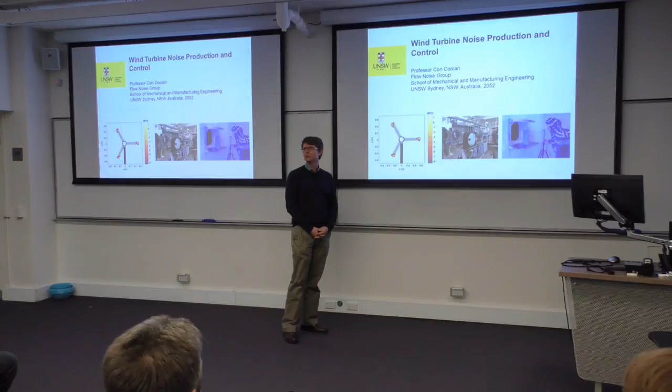I'm going to talk about wind turbine noise, how it's produced, and some ways to control it. I'm from the Flow Noise Group at UNSW, and we do more than wind turbine noise. We do a lot of airfoil noise, bluff body noise, all kinds of noise. We're even doing supersonic noise, but I can't talk about that tonight.

What I'll talk about is wind turbine noise. Here's a little outline of what I'm going to cover. First, a tiny bit about environmental noise, then how wind turbines produce noise very quickly, just the basic mechanisms, and then I'll go straight into how we've measured wind turbine noise in the lab. We've built a wind turbine noise rig, or rotor noise rig.

We've done numerical simulations, and from that rotor noise rig we looked at blade tower interaction noise. This is a very low frequency and infrasonic noise source on a wind turbine. Then we switch in the spectrum to trailing edge noise, which is high frequency noise production above 500 hertz. I'll end the talk with some recent work we've been doing on controlling trailing edge noise.

I probably don't really need to go over this to this audience, but environmental noise is a form of environmental pollution, and so it needs to be controlled. Noise from any source can cause either acute effects like hearing loss, or immediate effects through annoyance, stress, etc. But over long periods of time it results in hypertension, reduces learning in children, and productivity drops in the workplace. Even long term, it can cause health problems.

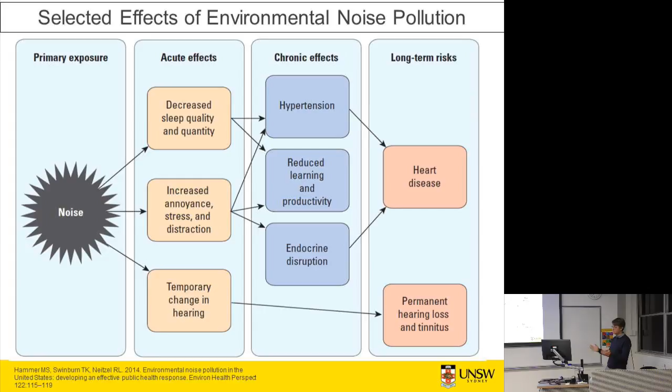And that's why most of us do what we need to do, which is measure and control noise in the community. So wind turbines are a source of noise, and they need to be controlled, and there are regulations around it. So it's a good thing to try and understand how they produce noise and how we can reduce it.

Reducing noise is good for the community around wind farms, but it's also good for producing more renewable energy, and it's also good for the cost of a wind farm. If you can reduce the noise of each unit, you can put more wind turbines per square kilometre. But more importantly, if you can reduce the noise from the tip, you can increase the speed of the turbine and reduce the torque loads on the gearbox, reducing the cost of the turbine exponentially. So there are good economic reasons for reducing the noise on turbines.

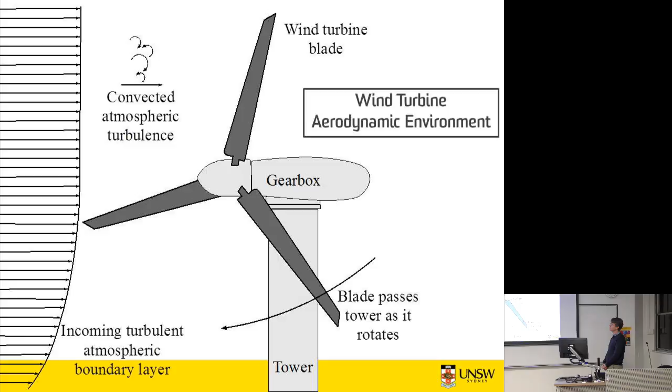This is a turbine sketch, and I'm going to talk about how the aerodynamic environment around a turbine creates noise. You have a turbine on a tower, in wind. The wind approaches the turbine through a boundary layer, an atmospheric boundary layer, so the mean velocity profile is faster at the top and slower at the bottom. As the rotors go through that boundary layer, they experience different loads, and those different loads create loading noise on the turbine.

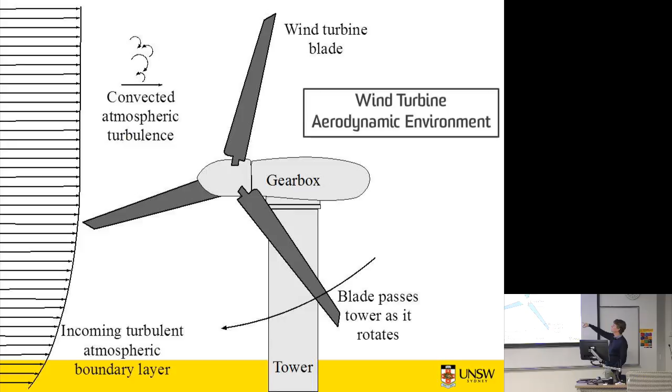That boundary layer isn't steady like that, it's unsteady. It contains atmospheric turbulence, so the air is unsteady and moving around. That turbulent flow interacts with the moving blades and causes broadband, lower frequency noise. As the blade passes the tower, there's a flow interaction between the tower and the blade. Even though it's an upwind turbine, the old downwind turbines had a very strong wake interaction.

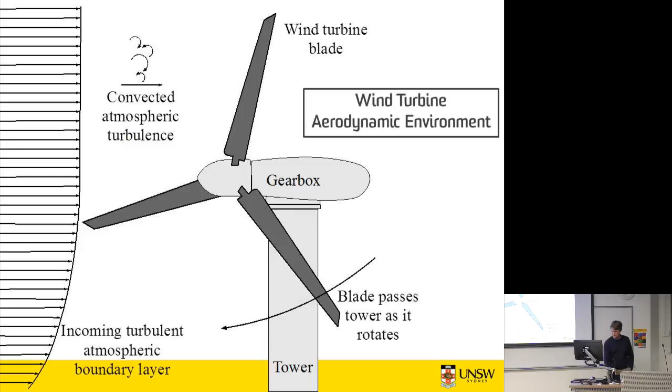As I'll show, the interaction between the blade and the tower is different in upwind turbines, and can create tones at the blade pass frequency and multiple harmonics. The other very important noise source is the trailing edge, which I'll talk about in more detail later. So let's look at a mock spectrum to describe wind turbine noise in a bit more detail.

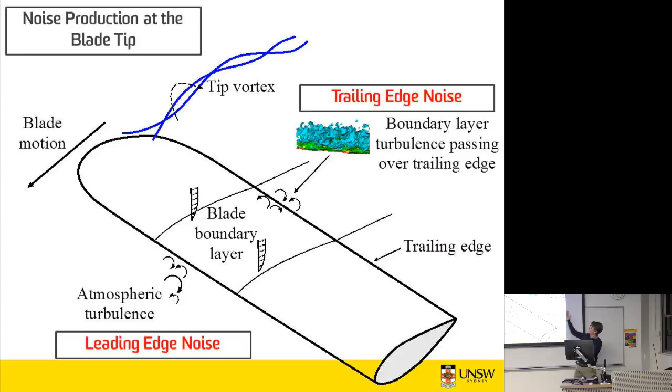Okay, so if we move out to the tip of the rotor blade, this is just a chunk of the tip and it's moving through space. You can see the atmospheric turbulence hits the leading edge. That causes fluctuating lift, fluctuating forces, and it creates noise. Then as the flow goes over the blade, it creates a boundary layer that becomes turbulent.

And as that turbulence passes the trailing edge, the unsteady pressure in that turbulence, when it goes from the blocked hard surface of the blade to the free surface behind the blade, a little bit of that energy escapes as an acoustic wave. And because it's turbulent, it's broadband, so it creates broadband noise.

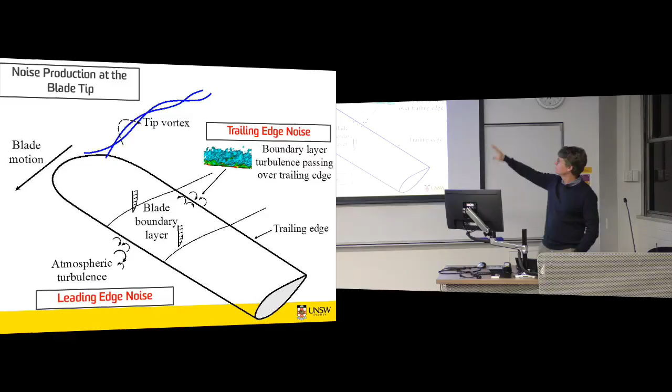So that occurs right along the blade, but it's only really noticeable at the tip because the tip is where it's travelling the fastest. So there are two noise sources there: the trailing edge noise and the leading edge noise.

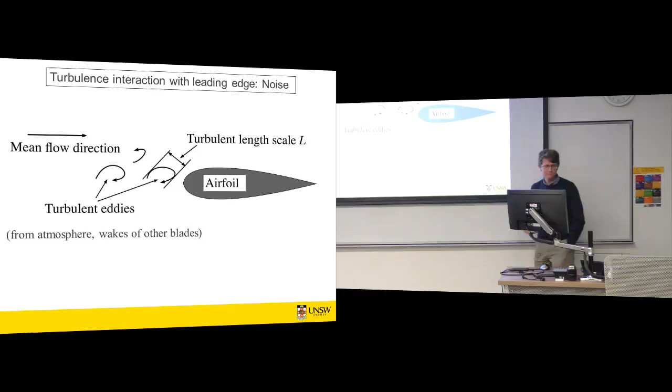Okay, this is a little sketch of how leading edge noise, or turbulence interaction noise, is created. They have turbulent eddies in the flow, and they hit the airfoil, creating a fluctuating lift and noise.

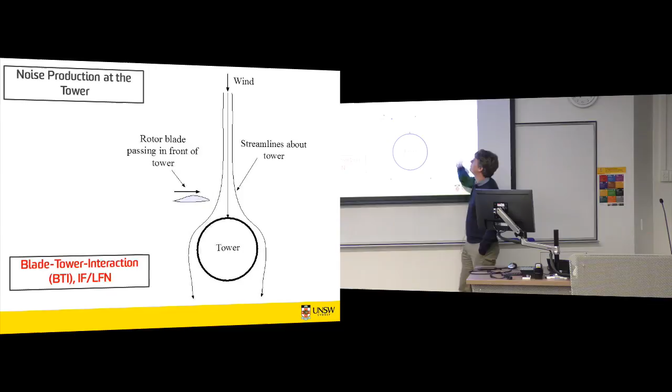So as that blade passes through those deflected streamlines, it creates unsteady loads on the blade. But that's not the whole story, which I'll show in some of our measurements. Anyway, that's a low frequency or infrasonic sound source, depending on the size of the turbine.

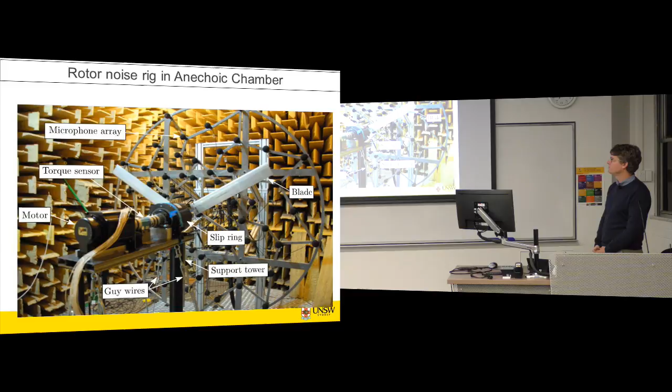Okay, so what have we done? We've been lucky enough to get funding from the Australian Research Council to look into wind turbine noise sources and its production, and this builds on a lot of work we've done on airfoil trailing edge noise, leading edge noise production and control. So one of the big things we did in this project was develop this rotor rig.

It's a 3-bladed rotor rig. It can be run as a fan - we always ran it as a fan, but it's designed to run as a turbine in a wind tunnel. What's it got? It's got 3 untwisted, straight NACA 0012 blades, so 1, 2, and the third one's down here. It's driven by a motor, and has a torque sensor and slip ring so we can get data out if we need to.

And we built a 64-channel microphone array with 64 GRAS precision array microphones. This is a picture at the University of Adelaide anechoic chamber where we did some of the tests that I'll show you today.

So we ran this as a fan, an unloaded fan with 0 pitch angle of the blades, and we also ran it at multiple pitch angles as a fan. The thought being that it's very difficult to get this into a wind tunnel and take useful acoustic measurements. Most of the physics of the noise production is the same on a fan as a turbine, and we're using this to validate numerical results, and then we can run the numerical model as a turbine and explore those noise sources as well.

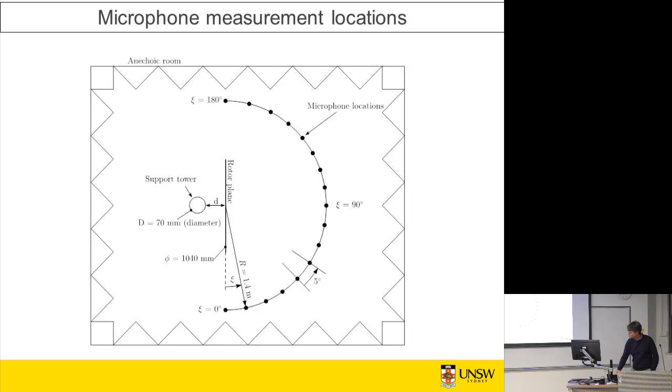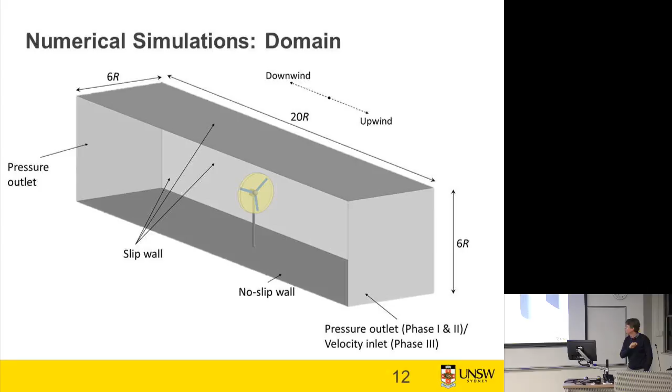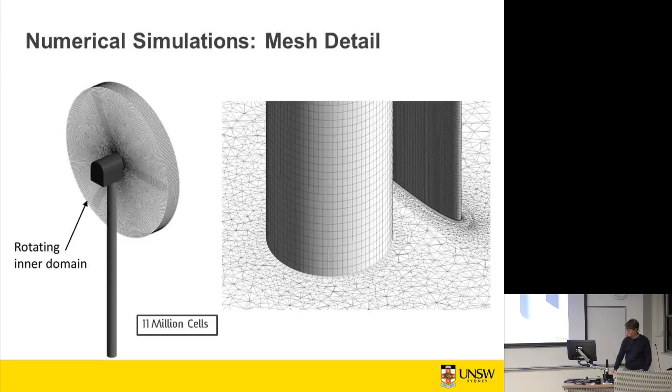For the numerical simulations, we did CFD of the flow through this rotor system, and Yendru, sitting here, did this. There's a computational domain and the rotor's stuck in the middle. We could have flow through this or not, depending on the situation we wanted. It was modelled with a rotating inner domain for the blades to spin around, and that's some of the incredibly fine mesh that Yendru put together for this project. So 11 million cells for that grid.

We used the CFD simulation to calculate the noise, and Yendru used an acoustic analogy for that. That took the fluctuating forces on each blade and the tower, and using the analogy you could calculate the acoustics at any observer position that you liked.

So what did we find? I'll show you some results. First, I'm going to show the rotor rig experimental cases, as an unloaded and loaded fan. So it's a fan with zero pitch and with multiple pitch angles, and then simulation results for the same, but with extra ones for a wind turbine test case. The first set of results is for blade tower interaction noise, which is low frequency noise, and the second set will be for trailing edge noise, which is higher frequency noise.

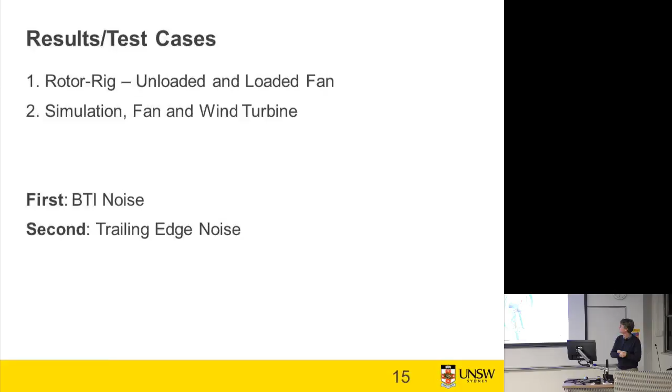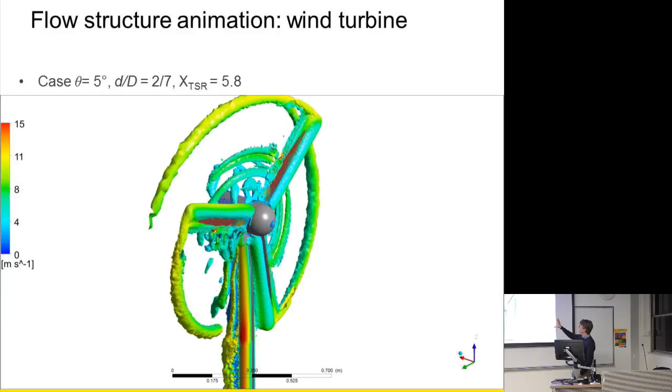As a wind turbine, if we now keep the fan the same but put in a forward velocity, it operates as a turbine. Very similar flow field, where we get tip vortices being generated by each blade, and then they convect over the support tower. I should mention this is what we call an unsteady RANS simulation. It won't get all of the turbulence spectrum, but it's very good at getting the part of the flow at low frequency. It doesn't get the high frequency component, so it's very good for doing the blade tower interaction simulation work.

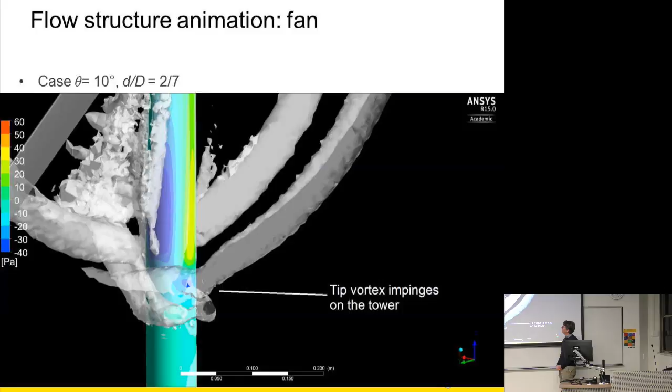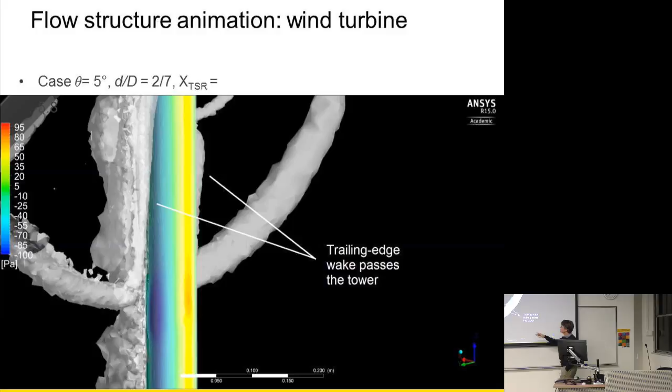If we zoom in at the tower, we can see the flow structures. This is the tip coming around, and behind it is a vortex, and then the vortex hits the tower as it gets convected downstream. That's as a fan. If we run as a turbine, this is subtly different aerodynamics. This time we're still getting the same vortex impact on the tower, but we're also getting this big wake structure going past the tower each time.

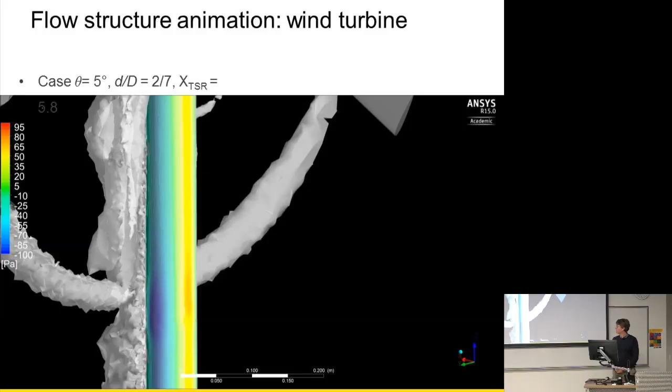So let's look at the pressure field and explain how the turbine creates low frequency noise. The top one is the unloaded fan, and you can see as the blade, zoomed into that same region - this is the blade, it's moving this way, this is the tower, and this blue here is low pressure around each side of the airfoil. Because it's set at zero pitch angle, it's the same either side. So as that goes past, these blobs are going to interact with this and create noise.

If you turn it into a fan, this side becomes the suction side of the airfoil, and the other side is the pressure side, so you get a higher pressure interaction with the tower. As a wind turbine, the opposite happens - the suction side, instead of being here, is on this side. So as it goes past, it hits the tower and creates a noise, but of a different character. I'll show what that means.

So here's a video - that's the unloaded fan. You can see as the blade goes past the tower, it creates fluctuating pressure loads on the tower.

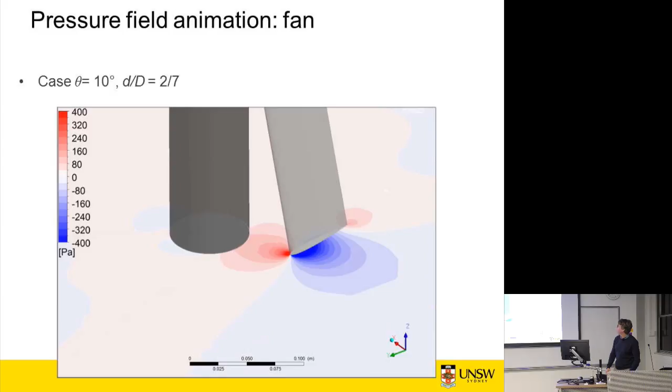So, what's the actual acoustic pressure look like? This is a comparison between an experimental measurement in the anechoic chamber and the simulation, for a microphone at hub height directly in front of the turbine.

So the turbine's going around, and right in front you're getting 3 pulses. This is phase averaged over multiple rotor revolutions, so we've taken out a lot of the stochastic unsteadiness, and we're just left with this black pulse. You get these 3 pulses every time a blade passes the tower.

And looking at Yenju's simulation, it's pretty hard to deny he's not capturing the major physics. So that was very pleasing to see that we can simulate that. So now we want to know what's going on.

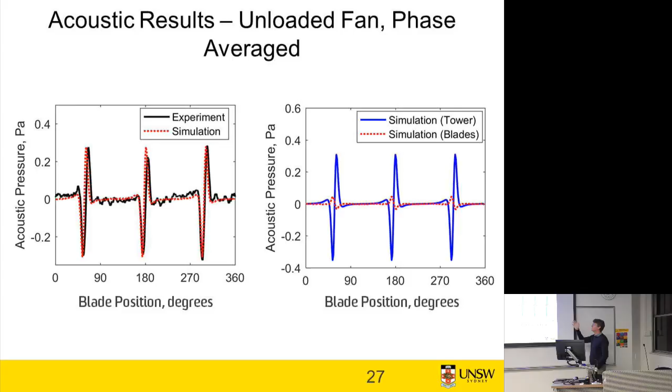The really surprising thing to us was, because we got the simulation and we're using this particular type of analogy, we can separate out the noise sources. We can separate what's happening at the blades and what's happening on the tower.

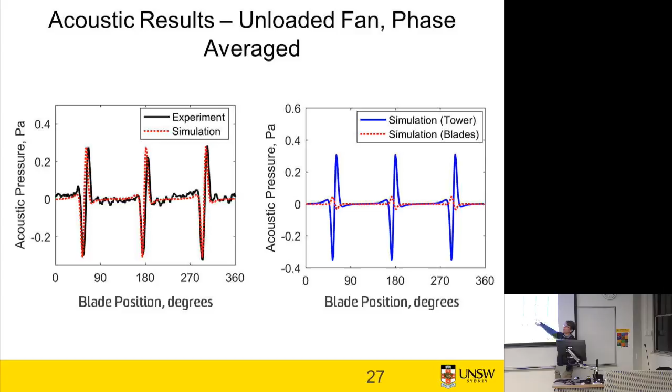The red line is what happens on the blades, so you get this little pulse, and it looks okay, but the major noise source is the tower. The tower itself is radiating much, much more than each blade, which was a real surprise to us.

And it must be true because we're getting such good comparison with our experiment. So the tower itself, as the blade goes past, because there's a distributed pressure load on the blade, there's this potential flow interaction. It just creates a large fluctuating force on the tower, and it radiates a big pressure wave.

So if we look in the frequency domain, we can compare the simulation and experiment. This is very close. So this is the experiment and the simulation, and the peaks match nicely, but because the simulation's on a computer, there's no background noise.

So this here is the background noise. Well, that's probably rotor trailing edge noise, which I'm going to talk about later. But this is the background noise of everything that's not blade-tower interaction, and the simulation doesn't get that.

But it does get the peaks, and because we got the waveform right, it's getting this really interesting phenomenon where this is the blade pass frequency, but the harmonics are much higher in intensity because the waveform looks like that, because, you know, it's not a sine wave.

So that's quite close, this one on the left, to the tower. If you move it away to one tower diameter away, that's kind of typical of a turbine tip.

If you look at a turbine tip under full load, it bends back. It can be around that sort of distance, and you still measure the interaction, but it's a lot lower than the closer case.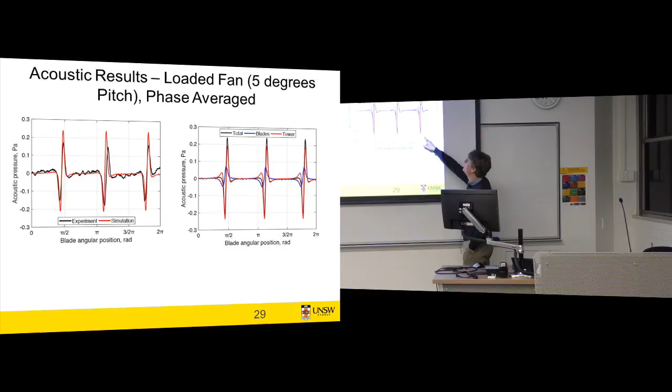But when you go to a turbine, because we've only simulated for turbine, what's really interesting is, because the low pressure side's now on the other side of the blade, everything lines up. So black's total, blue's blade, and red's tower, and even though the blade is reduced somewhat compared with the tower, for the wind turbine they all line up.

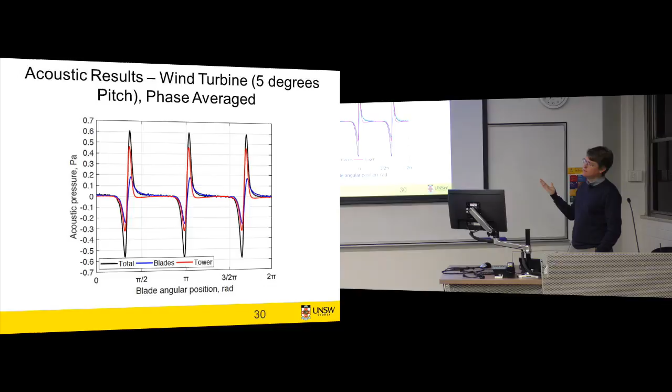So they all reinforce to give quite a strong pulse. That's quite interesting. So, you know, if you've got a turbine, the blade and the tower are both contributing to the low frequency noise that it generates.

So if you look at the directivity, how this pulse varies around the turbine, we've got different waveforms at different angles. We've got the sideline at 180 degrees, 135, and full on.

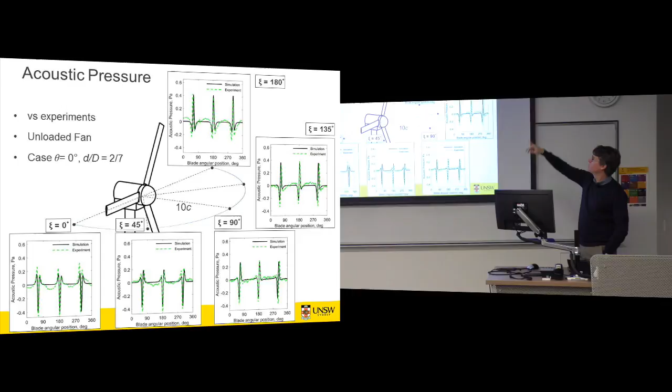We've already seen that one, and then off to the other side you can see how it changes. So on that side, as the blade is going that way, it gives a pulse out that way, and as it retreats, it's a suction pulse, and then you can see how it transforms as you go around.

You might notice there's not quite such good agreement off axis, and that's because the thickness noise wasn't modelled in the analogy. But I believe Andrew has modelled that, wherever he is, and he got it right.

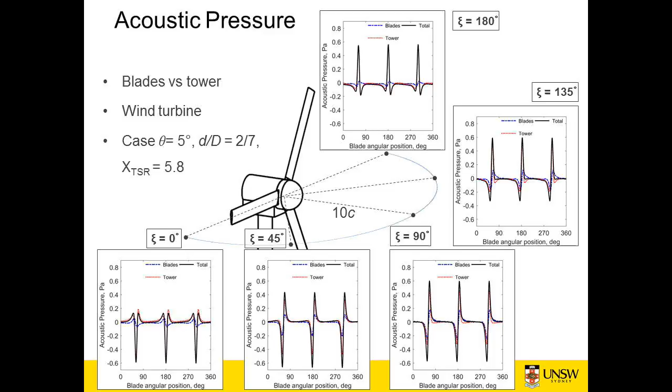Okay, so as a turbine, this is a fan. I'll go as a turbine, same sort of thing. You get a pulse out one side and suction on the other side, and it transforms as you go around.

But if you look at that per azimuthal angle of the rotating blade, that's like a dipole spinning around, because the force is spinning around the tower. So that's time averaged, and it looks like a monopole because it's circular, but in reality it's like a spinning dipole. So it's quite interesting physics.

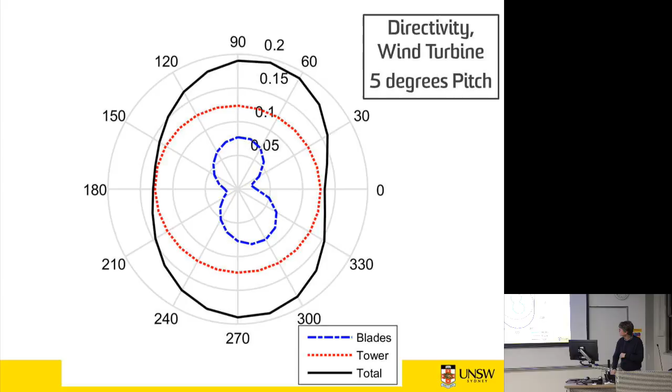Okay, so that's the low frequency side of things. So I'm going to shift gears now and talk about high frequency stuff. So this is how rotor blades create noise themselves. The flow travels over the blade, it goes turbulent, interacts with the trailing edge, and creates this thing called trailing edge noise.

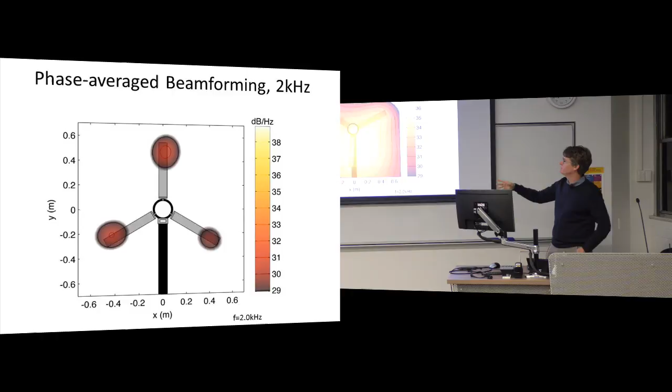As expected, the noise is predominantly from the tip region, because that's where it's going the fastest. And as it passes the tower, you get this flash, and I believe that's a reflection from the tower plus some sort of mechanical response of the whole system at that frequency. So that was at 2 kilohertz.

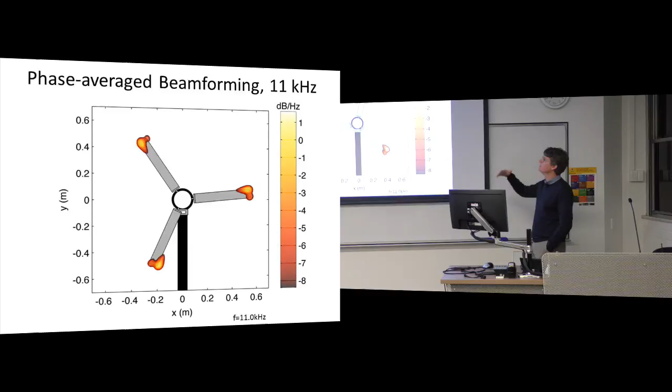So we go to 4 kilohertz. We're starting to see the noise source being more clearly defined, and jump straight to 11 kilohertz. Because this is scaled, these frequencies don't correspond to what you'd see in a large turbine case - it's probably about 8 to 10 times higher than for the same sort of conditions. But anyway, at 11 kilohertz, you can clearly see this is the brightest spot, and that's trailing edge noise.

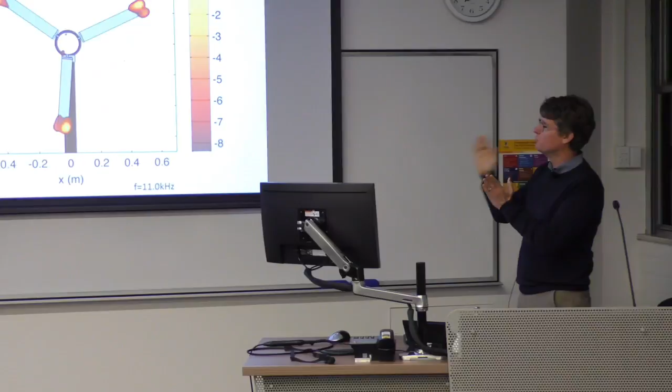We also get this interesting spot at the leading edge, and that's the tip vortices being formed - it's a square tip, you don't normally have a square tip, but it's tip vortices forming over that. It creates a bit more noise.

And we can even image up to nearly 19 kilohertz. And at 19 kilohertz, that leading edge noise source is very intense and quite prominent. So Zebb Prime, who did these acoustic measurements, called that the flaming turbine, because it looks like it was on fire.

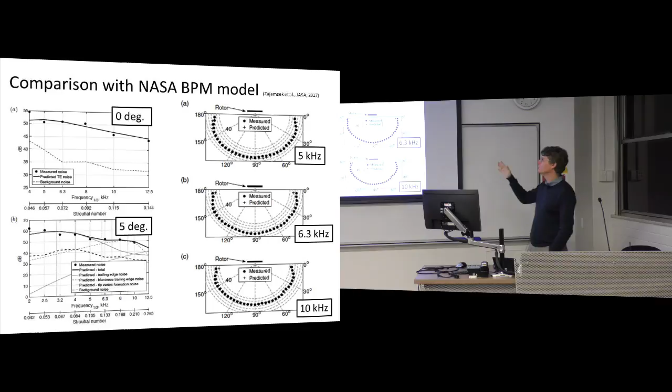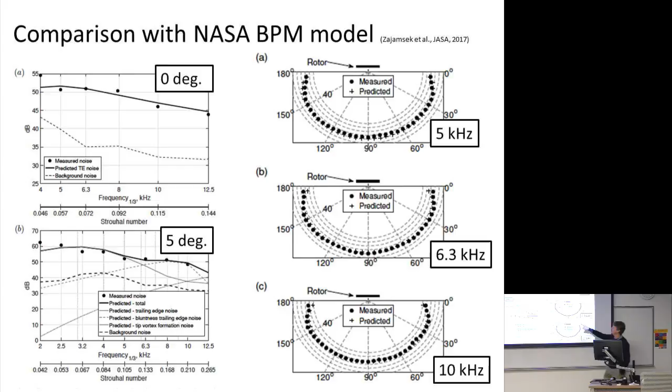We modelled the noise source using this NASA model called the BPM model for trailing edge noise. We've got a paper on it, but we showed pretty conclusively that from about 2 kilohertz up, it's trailing edge noise, because these are the third octave band levels, and that's what you'd predict from this special model for that rotor blade, and it works quite well.

Even at all angles, the dots are the measurements and the crosses are the predictions, and in most cases it matches pretty well. So we know we've got trailing edge noise working on that rotor rig. Now that we've got trailing edge noise on there, we know where the noise is coming from, so let's do some clever things to try and reduce it. So how do we do that?

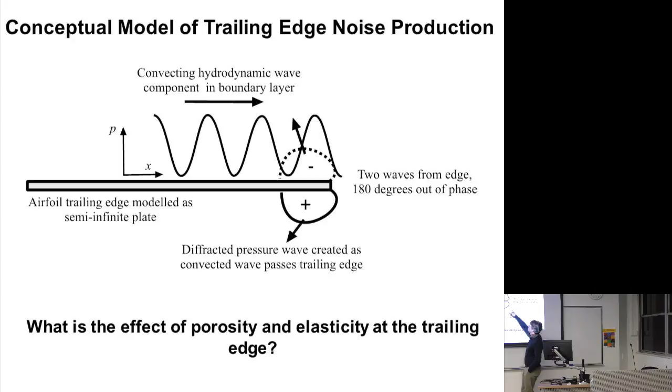We go back to first principles, and this is my crazy diagram about trailing edge noise. This grey rectangle is my idealised airfoil. Think of it as a semi-infinite plate that goes forever to the left, with an edge here. This sine wave on top is the boundary layer, full of pressure waves. If we take one wave number, we can model it as a sine wave of pressure convecting to the right. When that goes over the edge, the high pressure pushes around and creates an acoustic wave, and a rarefaction wave, an expansion wave, the other way.

That's trailing edge noise. Because it's turbulent, in real life that sine wave is a mess of all wavelengths and it's all random, but to help me think about what's going on, I just try to think of one case going over that edge. So the problem is how this is generating this pressure wave. How can we damp that out?

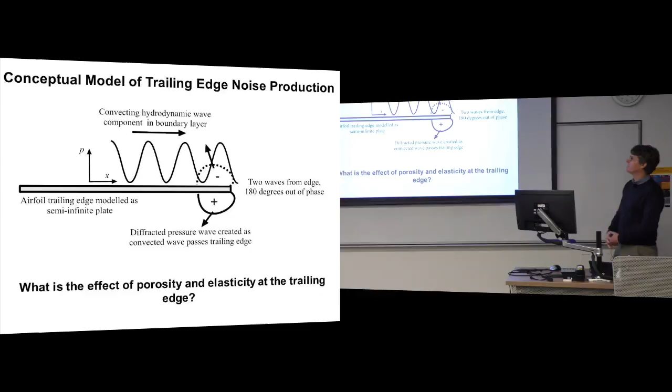So not just me, a lot of people are looking at porosity and elasticity at that trailing edge. If we make the edge porous, or absorbent, with some impedance that's not going from fully blocked to free, we can smooth out that transition from the sharp impedance change to more gradual, and we won't be as efficient at generating these acoustic waves.

A lot of this has come from looking at owls. It's been a topic for a few years now - we all know these particular types of owls fly incredibly silently, and we think it's because of the wings, which have all these features: a leading edge comb, a velvety coating, and what we're interested in, a serrated and poroelastic edge, so the edge has got a serrated shape and is simultaneously porous and elastic.

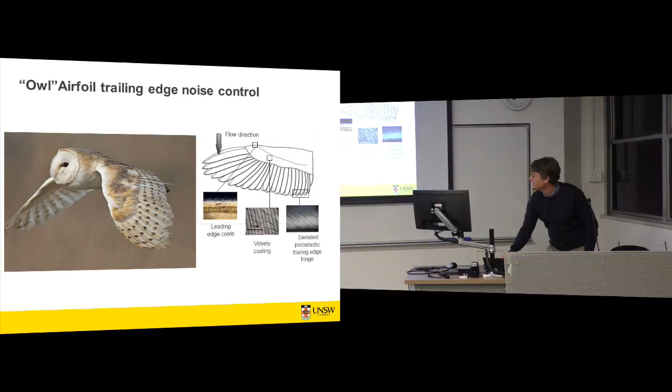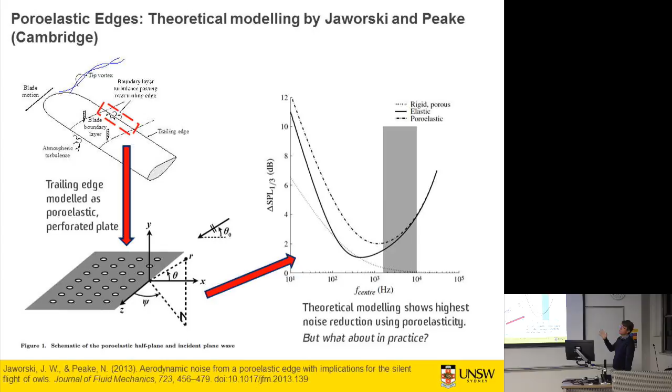That's prompted a lot of experimentalists to start playing around with porous and elastic materials to see if we can control this edge. So that's what we've been doing.

This is a schematic of our anechoic wind tunnel here at UNSW, not to scale. We have a contraction - there's a fan that sucks flow in here, we actually have a big muffler that's not shown, and it sucks air through here into the anechoic room, and we test in the open jet. Down the bottom is a photograph of inside here for a test I'm about to show.

This is Chao Yang's work, a PhD student of ours. Here's a NACA 0012 airfoil - that distance is 455 millimetres, and this is a 200 millimetre chord airfoil. We put edge extensions on here of different types, which I'll show you in a minute. This is a small microphone array we use to image the noise source at the edge and work out if it's doing what it should do. Chao Yang was very diligent and put a laser vibrometer, that's the red dot, and he monitored the vibration of that edge as well.

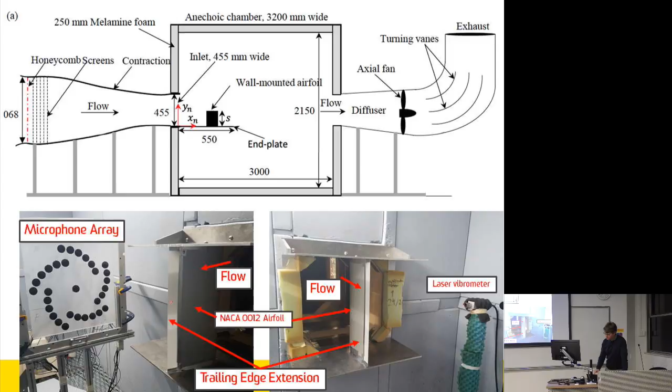He's been testing like crazy, you can't believe how many tests he's done, but this is some of them, I'm not going to show all. He's tested - this is a baseline, flat. He used 3D printing to produce all these things. 3D printing's great, you can produce crazy designs very quickly.

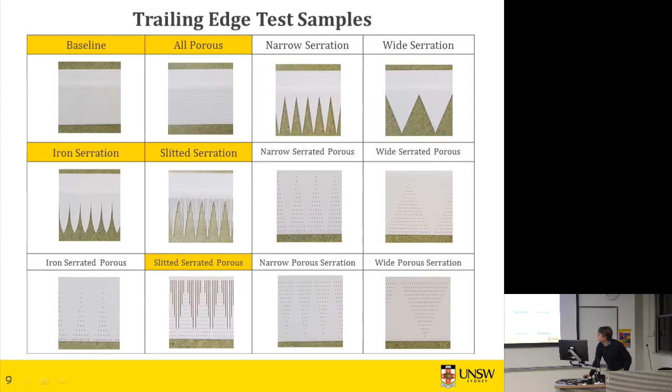Only limited by your imagination. So this is a baseline, so everything's compared to this straight, normal edge.

This is the all-porous design. This is to test the theory from Cambridge. This is very similar to how they model the poroelastic edge.

He tried these serrations that are typically used today on turbines. He tried this called iron serration - it looks like a feathered edge. And then he tried these different designs, this is slitted serration, so they're tiny little slits. He's done this design with pores and solid in serration-like design, changed the wavelength, and put slits and pores together. So there's a lot of data.

I'm not going to show all of it, just a couple of these ones, to give you an idea - this is pretty new actually.

So using the beamformer, this is an image of the trailing edge, this is the airfoil from side on, flow goes this way. This blob is the trailing edge noise. What we can do is integrate around there and just get the noise from the trailing edge. This is some extraneous noise from the inlet of the tunnel - we can get rid of that and just look at trailing edge noise.

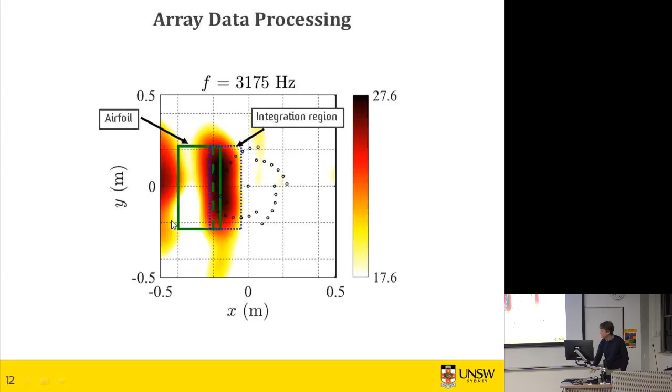So what type of results do you get? How to interpret this: these are third octave band spectra. This is the all porous design that the theory guys used. This is the baseline, and the red is the measurement of this design. Grey means noise increase, white means noise reduction.

So the all porous design is not very good because they didn't model scrubbing noise. As the flow goes over the top of these holes, they create lots of turbulence, and that turbulence radiates away quite efficiently, which is why we get massive noise increase at high frequency. So while it works a bit here, it's not so good up here.

This is the slitted serrated - again, that didn't work very well. Too many pores, it's too thin for the pores to be very well. It's too thin for the damping, the dissipation in the pores, to overcome the extra turbulence generated by the pores themselves. So you're getting noise increase over most of the frequency range.

This is a vibration response. I honestly haven't spent a lot of time interpreting what these mean, but you're getting more vibration when the noise is louder. That's what we're seeing on there.

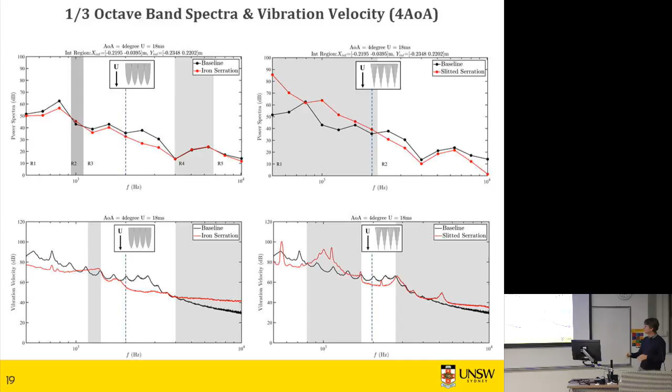But what we are looking at now is how can we integrate more novel porous structures into the blade itself. So now with 3D printing, we can actually print an entire rotor blade for that rotor rig that I showed you - 0.5 metre size, and we can have whatever porosity we'd like in the edge.

One approach we've done is think of different porous structures, make impedance tube samples, print them at a special setup, and test their acoustic impedance to come up with an empirical model of the absorption of that design.

If we think it could be effective, we print a rotor blade. This is a rotor blade tip, but we do whole blades, printing that porous structure directly into the blade, so there's no need for an add-on, because add-ons add drag and reduce lift. The idea is by integrating it directly, we get much better performance and reduce the losses.

Let's look at this one. This is a typical sample, very simple, and we've only really done simple samples to date, where we just have porosity through holes in 3D printed plastic parts.

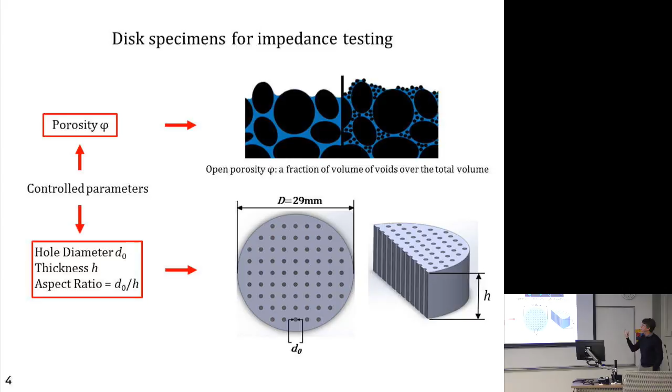We've done loads of different porosities, from a solid reference, to this aluminium that's very porous and doesn't do anything. We have different thicknesses to change the porosity, the aspect ratio, and a bunch of other parameters I could go into, but I'll just show some interesting results.

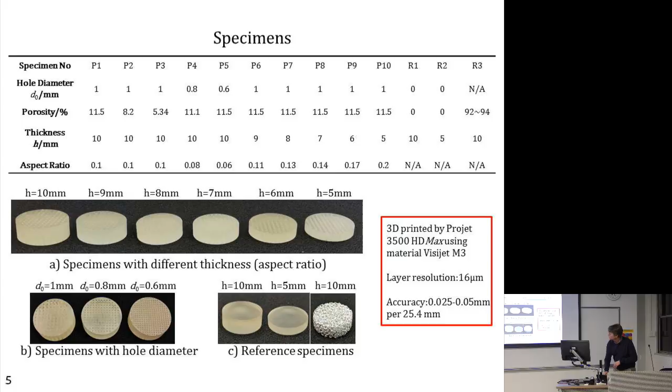The good thing about 3D printing is you can put subsurface cavities in, and I think that's the key to getting this to work. Not that we've proven it yet, but by putting in a subsurface cavity, as opposed to just having pores, we can change the sound absorption coefficient.

This is the sound absorption versus porosity for this type of design, and it varies a bit, but if you start putting in cavities of different thicknesses, you can move around this absorption region. It turns out, and we probably should have realised this before, if you make very fine porosity at the top with a reasonable air gap, you get very good broadband absorption in that 3D printed sample, which is just what you need for an airfoil.

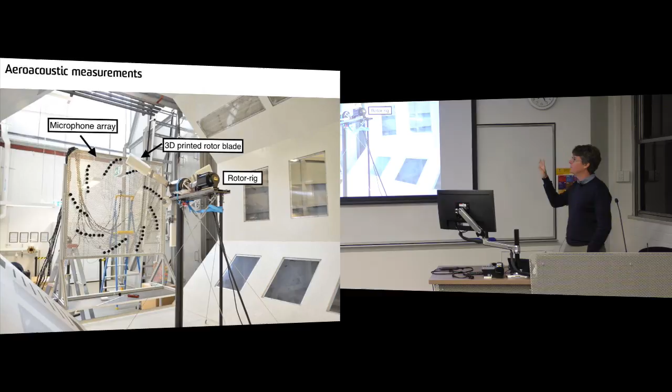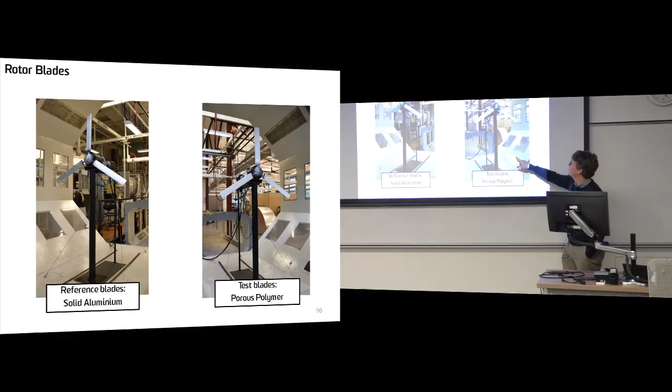We tested this for a couple of different test cases, and I'll show you one. We put it on the rotor rig again, in the wind engineering test section, but just as a fan with our new array. Instead of the actual test, this is what I'll show: I'm comparing solid aluminium blades with an identical type of blade, each 3D printed with porosity at the trailing edge.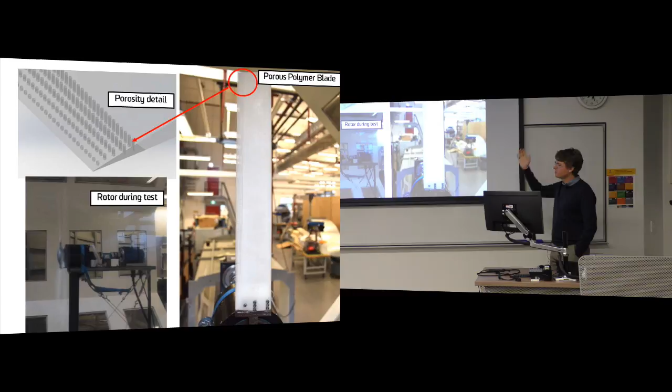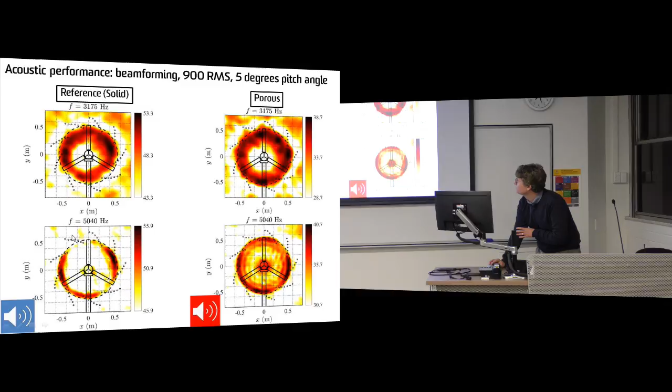These are the beamforming images. On the left is a solid blade at 3 kilohertz and 5 kilohertz, and this is the porous blade. Both are getting noise at the tips - there's some dropout there, I'm not sure what that is. But the thing to look at is the dynamic range: this has a top of 53, this has a top of 38, so levels come right down.

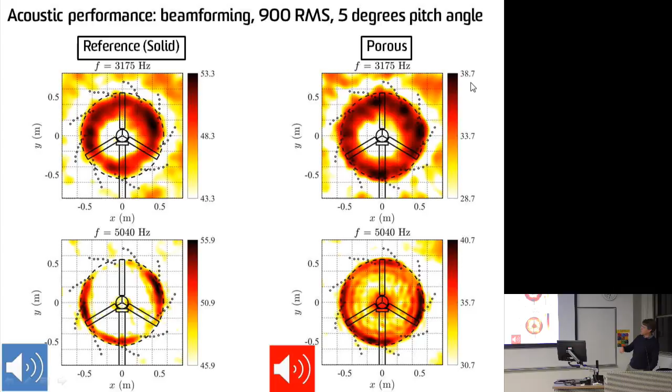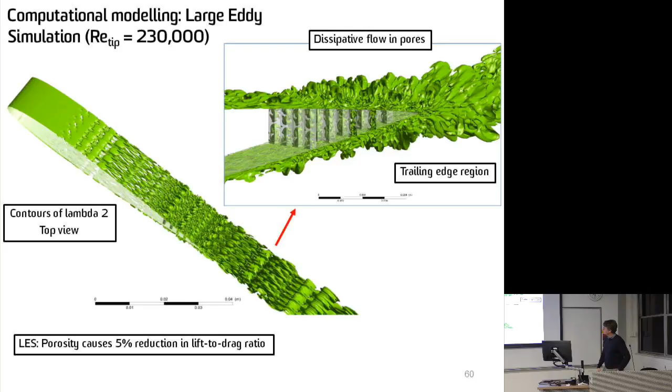That's it, that's all I've got. So, there are some conclusions there.

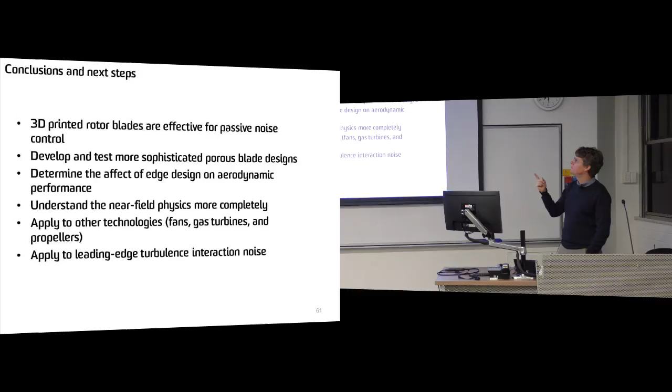For the porous blades, we think there's a long way to go to optimise them and to look at very different designs, especially subsurface cavities, much longer pores that can go up into the body of the blade. With 3D printing, we can try so many different designs.

But what we need to do as researchers is understand the near-field physics really much more completely than we do now. So we're doing a lot more wind tunnel tests and exploratory work. We want to look at other things like gas turbines, because this is a big problem for gas turbines. We're also lucky enough to have a metal 3D printer about to be installed, so we can do metallic blades. This could also be a good technology to control the turbulence interaction noise at the front of the blade, at the leading edge.

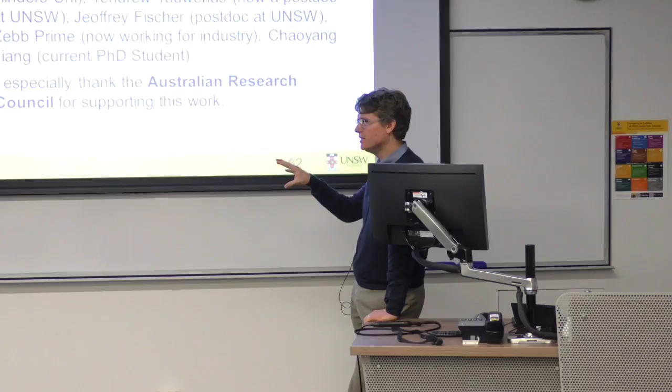Well, you'd have to talk with the developer or designer of wind farms, or people who do the compliance work. I think it is important, because if you get too many together, you could have an audible component at 1.5 kilometres. But I think 600 metres is about the normal audible range of these things - though I'm not that person.

No, but most of our frequency issues are because of atmospheric absorption and so forth. Yes, that's true - you don't really have a problem above about 630 hertz, above 630 hertz most of it's attenuated out quite significantly. Trailing edge noise will go down below that, to the 300 hertz region, on these big blades.

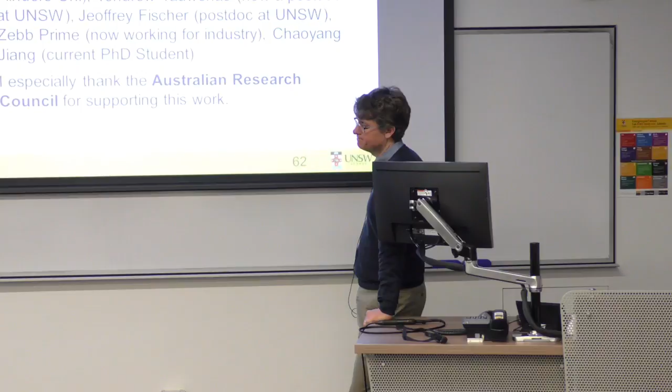Then that would be touching into the areas of concern. But what I did take from the first part, when you talked about it, was the acoustic pulses you were getting going past the tower. It would seem to me, to the best of my knowledge, that we don't look at how we might best attenuate those. And I guess that leads to my question: are those pulses really confined to the tip of the blade? Because we're looking at 60-metre blades, so when those pulses go past the tower...

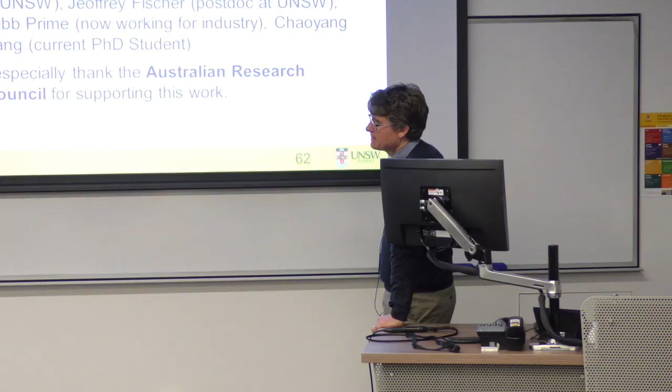Let's see if I've got the right figure. The tower is the biggest noise source, and it's distributed over a fair distance of it. But I guess, is the tower mainly excited by the tip? Because that's where you get the higher velocities. I should have brought the full data - maybe Yendri can tell me. Can you remember the extent on the tower? If you play the animation, you can see the pressure is changing - there, you can see it there.

It's not just limited to the tip. See how big that is - maybe 8 or 10 metres on a real turbine, on a 60-metre blade? Easily. So would that be an area we should look at how we could attenuate?

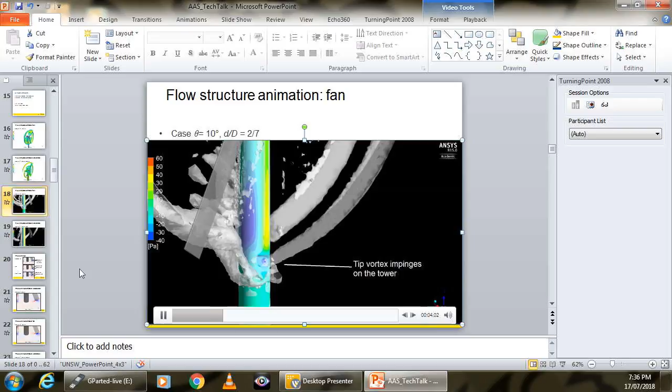That's the controversial thing - if the infrasound is a problem. I don't know, is it a problem? If it isn't, it's not, but academically it's very interesting. A good way to get rid of it is to change the shape of the tower, and to put sweep on the blade.

Would it be a change in the shape of the tower, or looking at some of those materials or technologies? You could put damping, you could put porous materials. But to your knowledge, has that been looked at at all? No, nobody's looked at that.

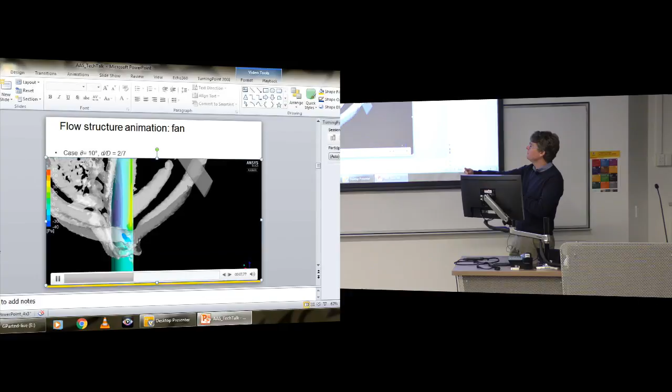Well, they do know now after we've done it, but the tower wasn't considered as a noise source. Nobody considered that the tower would have significant forces on it - not since the days we put the blades in front of the tower rather than behind. When they were behind, they were interacting with the wake, so they were a long way from the tower. But now they're in front and reasonably close to the tower, it's generating a lot of load, and that's creating an acoustic pulse.

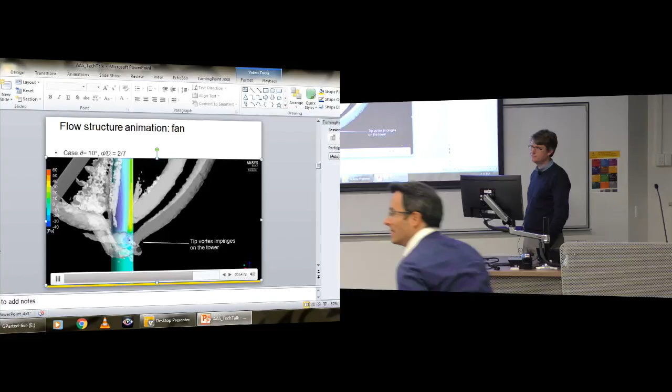So that might be something we talk further about. Yeah, absolutely. You mentioned in passing that they tried sweep, putting the blades non-radially. Well, that's an idea of ours, but they use that quite a lot in fans, and it works very well because you're spreading the load over time, reducing its intensity.

Just going on from the last question - have you ever seen a rotor blade with a bit of a curve on it to try and fix this, like a sickle? No, I've never seen that as a wind turbine, but certainly a low-speed fan might have an effect on that. But putting a curved 60-metre rotor blade on a truck might pose a problem. That's right, I've got one. Or just spinning it, the dynamics of that might prove challenging. Yeah, but that's why we're here.

I have one more question. Most of the noise camera results I've seen show that most of the tip noise is created not evenly, but on the downward side.

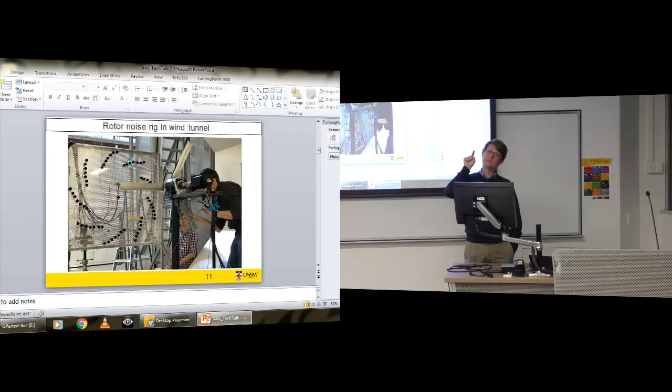So that change isn't that important for trailing edge noise. Trailing edge noise is generated by the boundary layer itself, so that slight fluctuation isn't going to change the turbulence in the boundary layer so much. So when you see a higher noise source looking up at a turbine, this blade seems louder here than there because it's coming towards you - convective amplification - and that noise source has a directivity forward from the trailing edge, like a spotlight going forward. So there's two things adding up, but the main thing is convective amplification because it's rushing towards you.

Any more questions? Getting back to the tower blade interaction - is there an optimum position of separation of the blade from the tower? Oh no, it just decreases the further you put it away. So the further you get it from the tower, the better. But I guess there's all other mechanical design issues, cantilevering the rotor off the top of the tower.